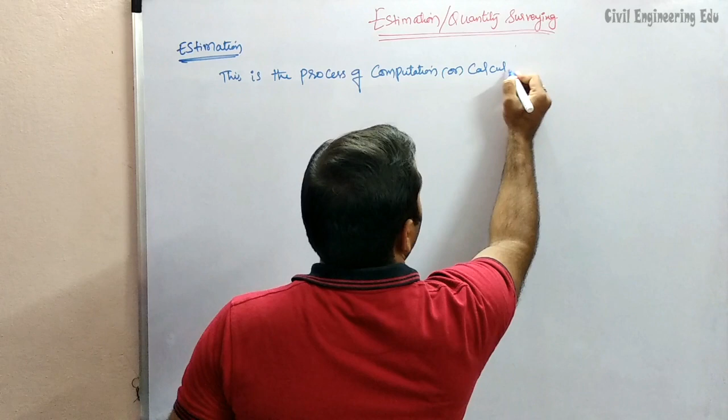So what is estimation? It is the process of computation or calculation of quantities required and also cost of a project before execution.

It is most important to know the quantities of the project as well as the cost. Mainly we need to focus on quantities required like men, material and machinery. These are most important for every project. We should know the quantities of them.

The next one is doing rate analysis and finding the cost of the project. This is nothing but estimation. Before any execution of a project, we should have proper knowledge on quantities required as well as the cost of the project.

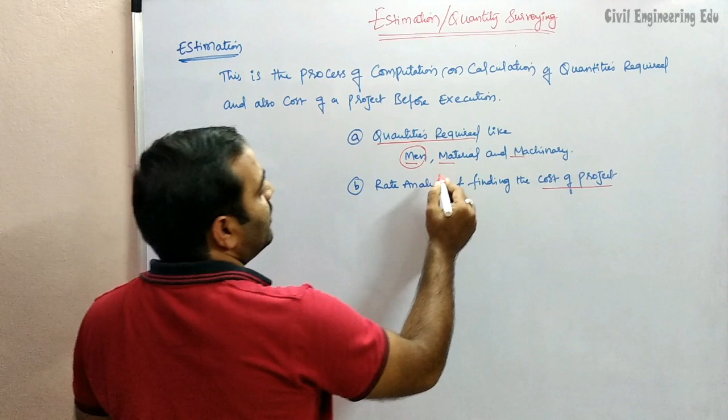Men means different types of people working in the construction project. They may be engineers, supervisors or any kind of laborers. Different materials will be used, like cement, concrete, steel or any other material. The next one is machinery. Different types of machinery are used in the construction project, and that should be known before execution.

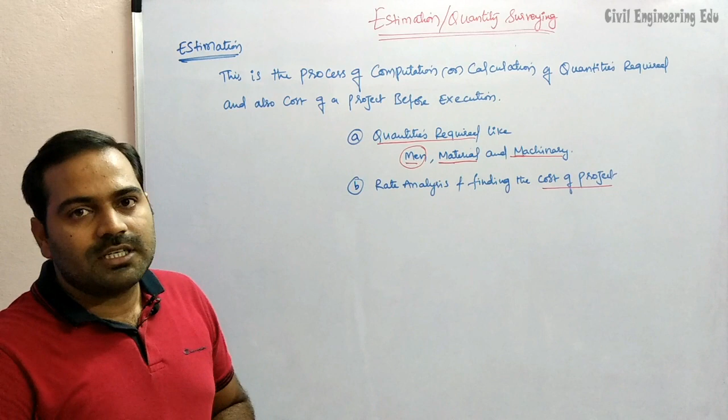This will give us a proper idea about the project. Every engineer, builder or owner should have proper knowledge on these. This is the importance of estimation and costing, also called quantity surveying. Let us see the actual purpose of doing estimation.

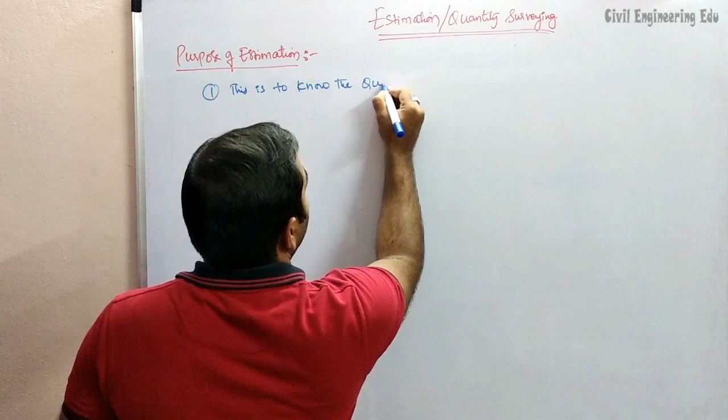Purpose of estimation. Here I'll write a few points. First, the main purpose of doing estimation is to know the quantities required, like men, machinery and material. Second one is to know the project cost.

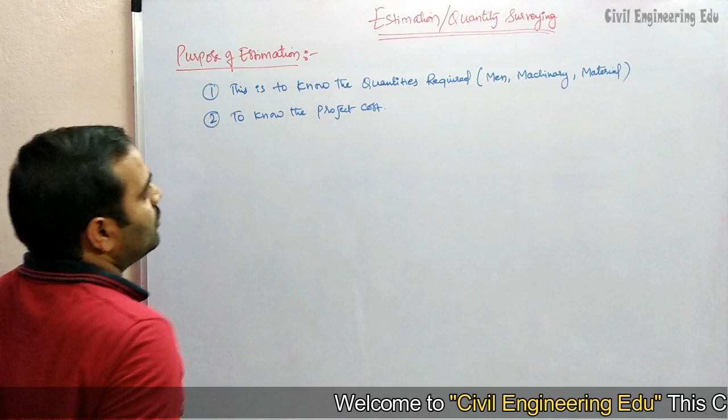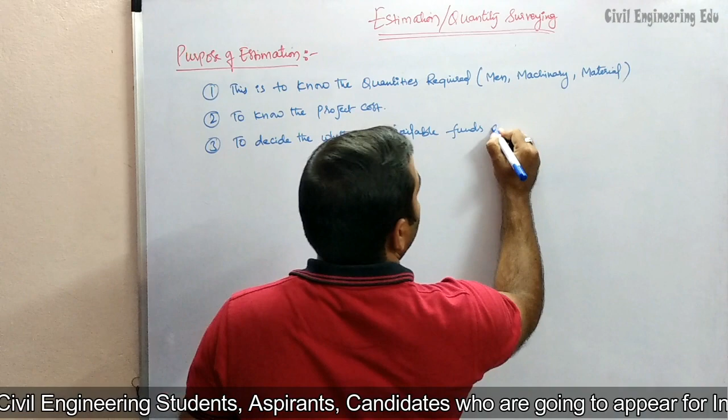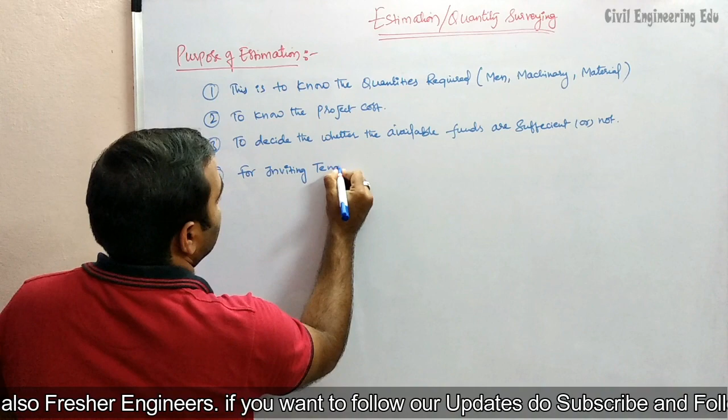Third one is to decide whether the available funds are sufficient or not. Fourth one is for inviting tenders. This is also one of the important points.

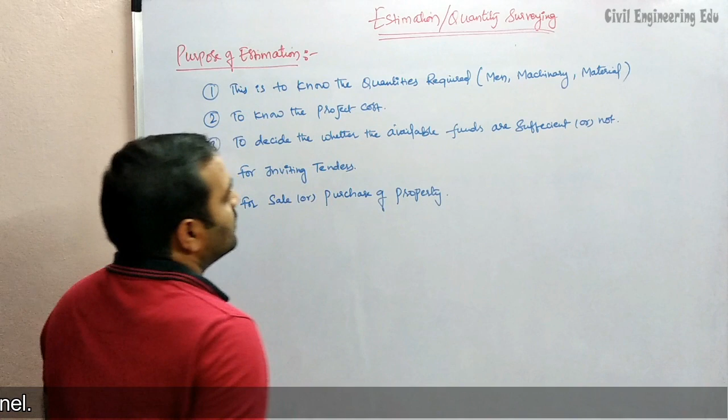Fifth one is for sale or purchase of property. Sixth one is for registration and deciding stamp duties. These are the six important points describing the purpose of doing estimation.

First is to find out the quantities like men, machinery and material. Second is to know the project cost. Third is to decide whether the funds available are sufficient or not. If not, we can go for some arrangements. If it is not possible to arrange the funds, we can modify the specifications so that the project cost can be decreased.

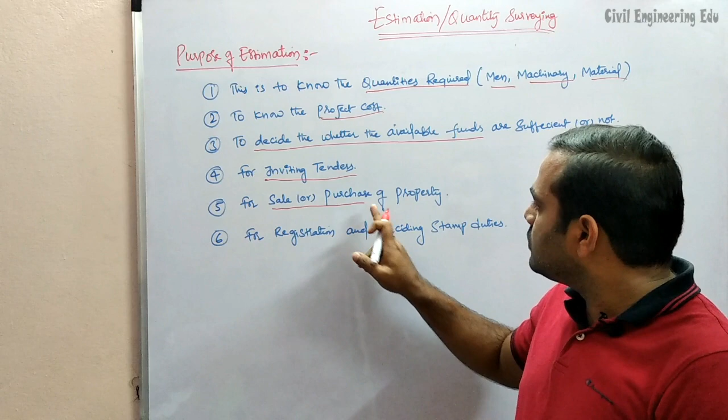Next is for inviting tenders for a project. Next, for sale or purchase of property, the property value should be known, so we do the estimation. Next is registration and deciding stamp duties. For property registration we should know the property value, so we do estimation. These are the important points for doing estimation. Now let us see the duties of a quantity surveyor.

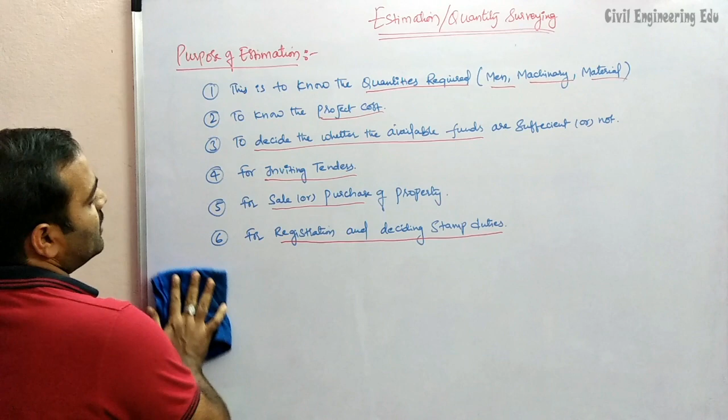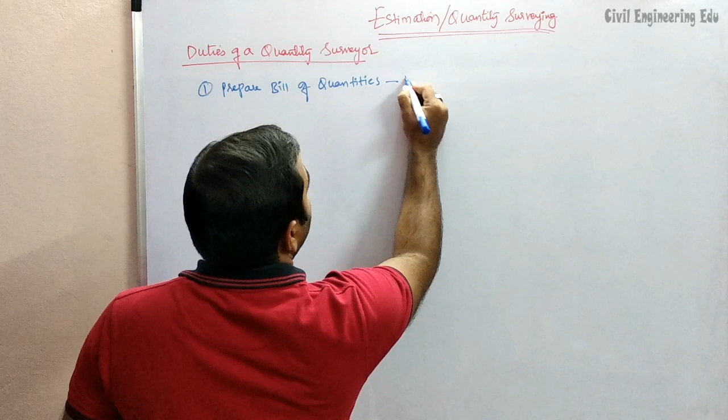So what are the duties of a quantity surveyor? What is the actual role and responsibility of a quantity surveyor, or he can also be called as estimator? So first one, prepare bill of quantities. It is also called as BOQ.

Second one is preparing bill of adjustments in case of modifications in designs during execution. So he needs to prepare bill of adjustments in case of changes in designs.

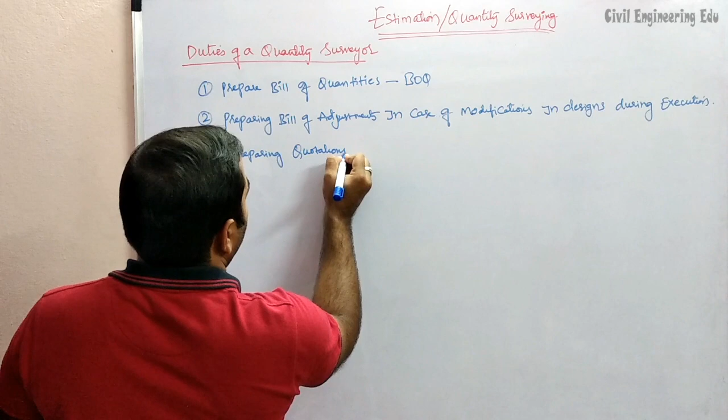Third one is preparing quotations or estimates for inviting tenders.

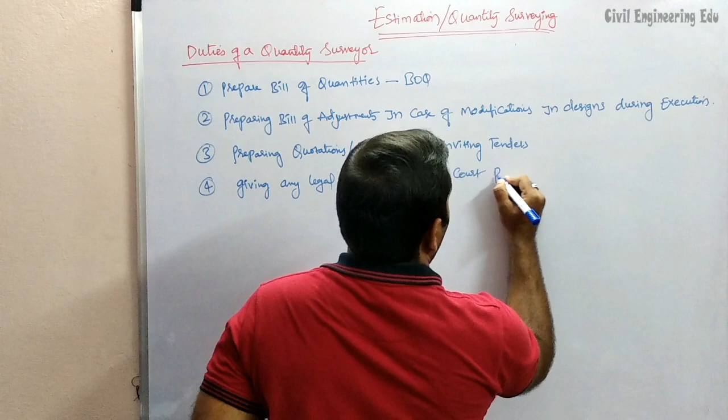So here fourth one is giving any legal advices in case of court proceedings. So these are the most important points and these are the responsibilities of a quantity surveyor or an estimator.

So here if you see bill of quantities, this is done based on the help of drawings. So drawings are more important here for preparing bill of quantities, that is also called as BOQ. Next one is preparing bill of adjustments. In case of any changes in the designs during construction, at that time also we should do the bill of adjustments.

Next, third one is preparing quotations or estimates for inviting tenders. So here it is the role of a quantity surveyor to prepare this. Next one is giving any legal advices in case of court proceedings. So in this case also he is the most important person. So these are the duties of a quantity surveyor.

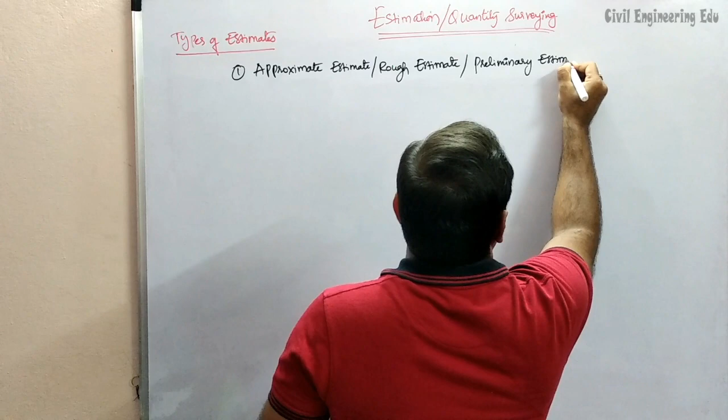So now let us see what are the types of estimates. Mainly estimates are of three types. So first one is approximate estimate, or rough estimate, or it is also called as preliminary estimate. Second one is detailed estimate and third one is abstract estimate.

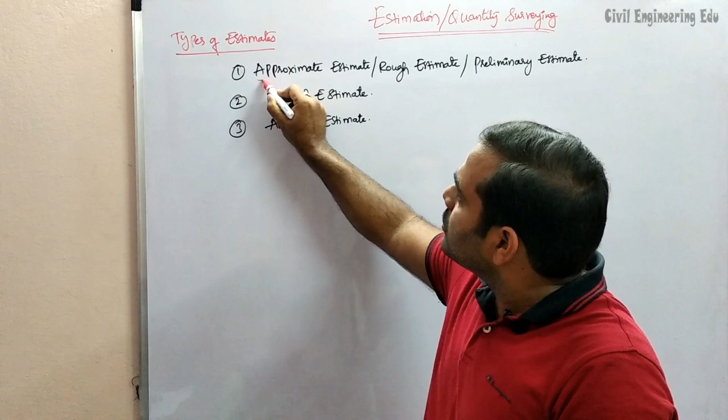So these are the three important types of estimates we come across. First one is approximate estimate, also called rough estimate or preliminary estimate. Second one is detailed estimate and third one is abstract estimate. So let us see what are they.

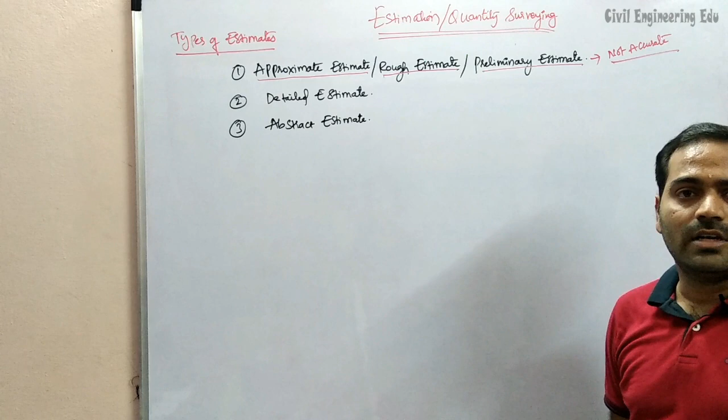If you take first one, this is not accurate. So whatever the cost, whatever the quantities we are finding here, this is only for preliminary study. This is just for idea purpose. So the estimated cost we got here is taken into consideration for preliminary levels.

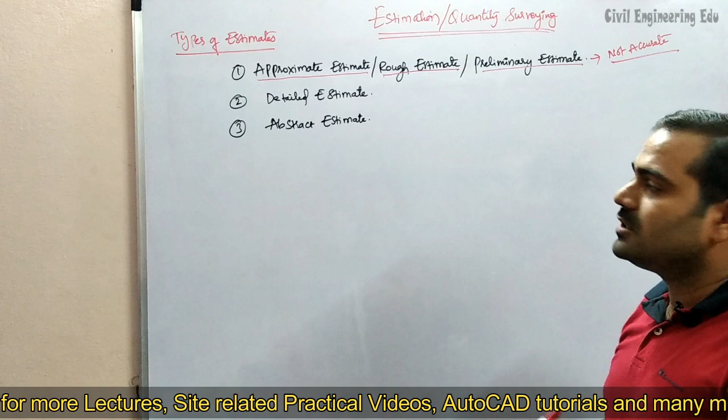So second point is here data is not required. Data like drawings, specifications, and third one is rates. So in this method, rough estimate, which is not accurate, data like drawings, specifications and rates are not required. This is only done for preliminary study.

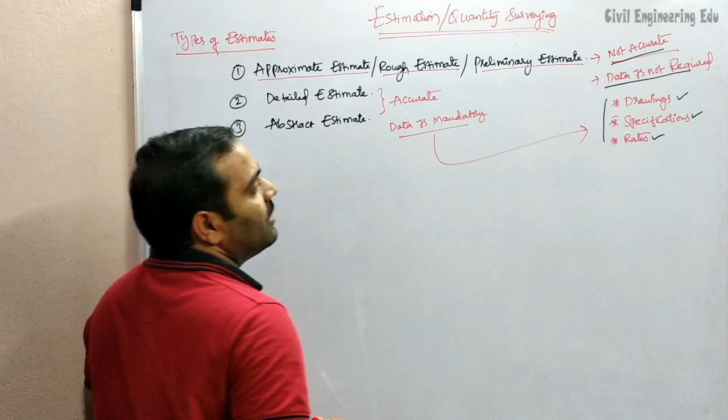So coming to second and third one, these two are accurate methods and data is mandatory. What is the data? Drawings, specifications and rates. These three are most important for doing detailed estimate and abstract estimate. So let us see one by one with an example.

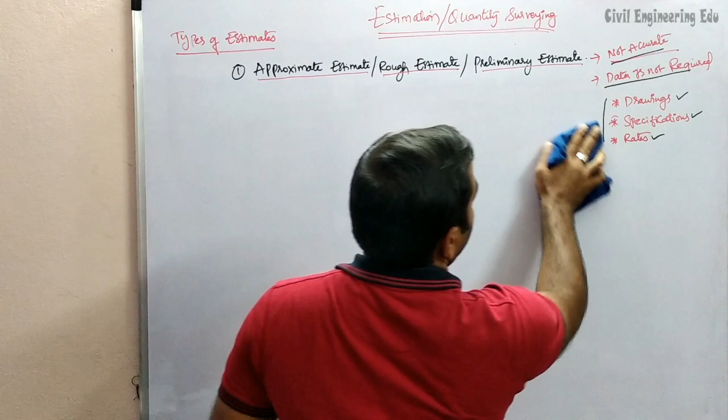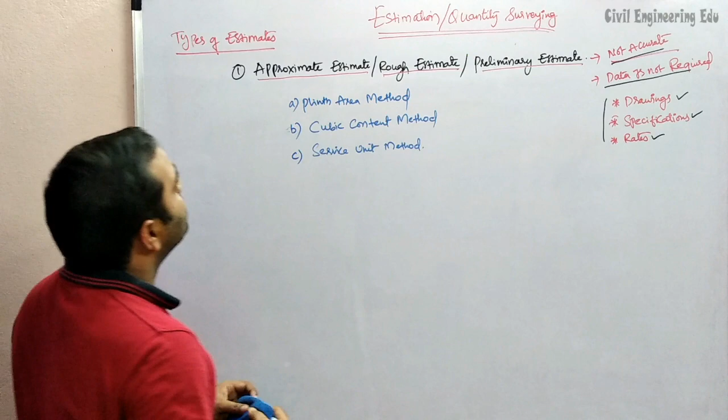Now this approximate estimate is again divided into three types. First one is plinth area method. Second one is cubic content method. Third one is service unit method. We will see these three methods one by one with an example so that you can understand it clearly.

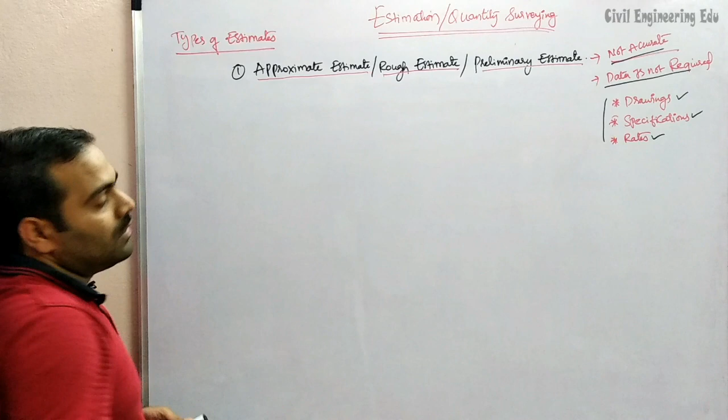So first one, plinth area method. These methods are mostly used for building calculations. So the formula for plinth area method: cost of building is equal to plinth area multiplied by plinth area rate. This is the formula we use for calculation of cost of building.

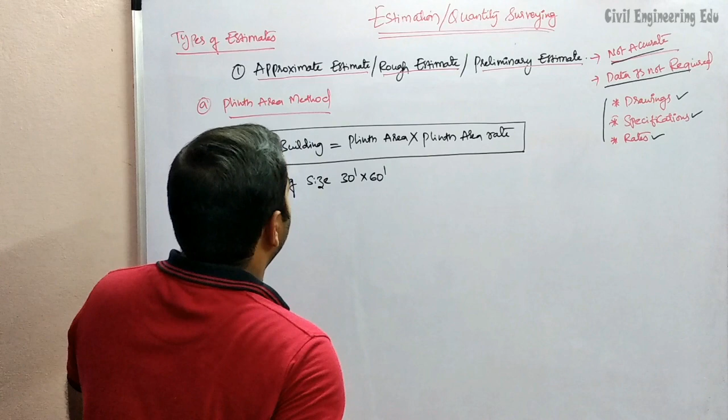So let us take an example. If I want to construct a building on a plot of size 30 feet by 60 feet and find out the cost of building, let me draw the plot. 30 feet this side, 60 feet this side. So area of plot is equal to 1800 SFT.

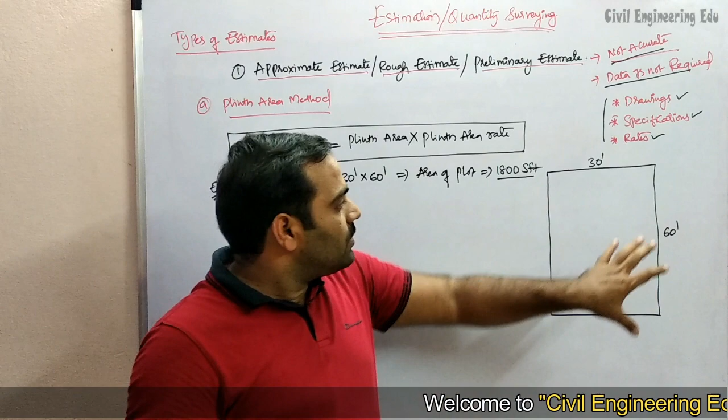So if I want to construct a building on that, according to the local municipal body, there are some norms. So we need to leave the setbacks for this plot. I'll show it here.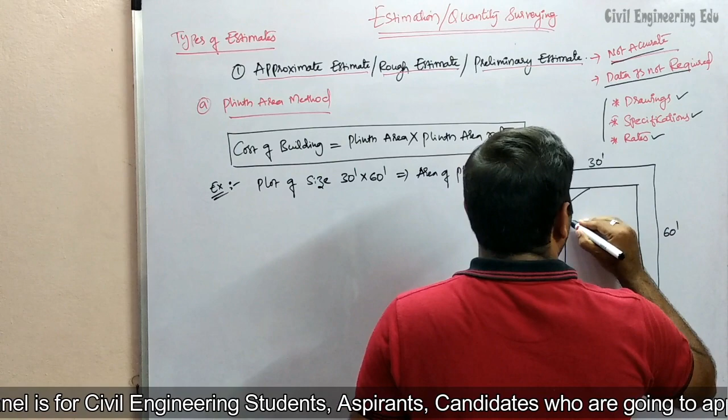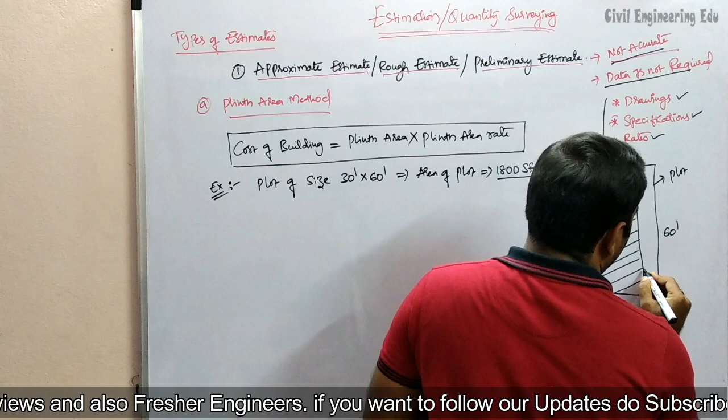So the area which I have drawn here, this is the area where we do the construction. So here it is, this is plot and this is plinth. So this outer box is the plot and this hatched portion is the plinth or built-up area in which we are going to do our construction.

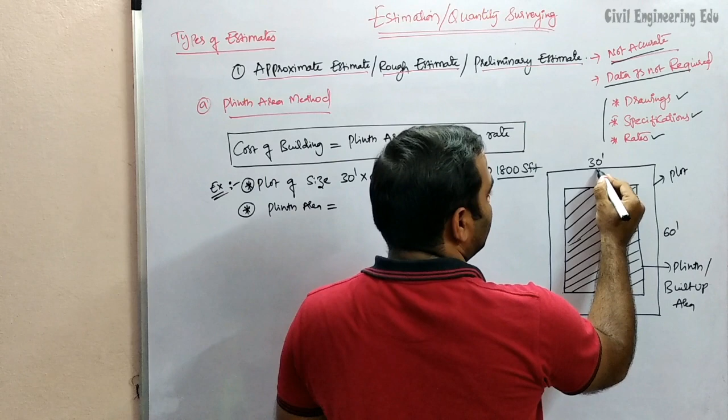So here, in the first one, the plot size is 30 feet by 60 feet and the area of the plot is 1800 SFT. Now let us see how to find the plinth area. According to the local municipal body, as I told you, there are some norms. We need to leave some gap all around the building. This gap is called setbacks. Setbacks are the space left over to provide proper ventilation and fresh air to the building.

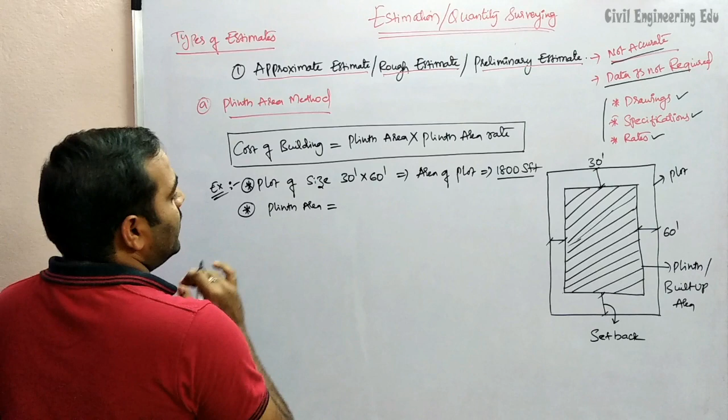So here we need to leave the setbacks. For plinth area, I am taking 75% of the plot area, that is 1800 SFT. The remaining 25% I am leaving as space for setbacks, for proper ventilation. So how much plinth area will I get? 1800 SFT into 0.75, so I will get 1350 SFT. This is my plinth area. Plot size is 30 feet by 60 feet and the area is 1800 SFT, but I am going to use only 1350 SFT for construction.

The third point is rate. How should I know the rate? Whenever we need to construct any kind of building, we will contact a contractor or an engineer. If we consult a contractor, he will charge around 1300 rupees per SFT to 1600 rupees per SFT. Our plinth area is 1350 SFT.

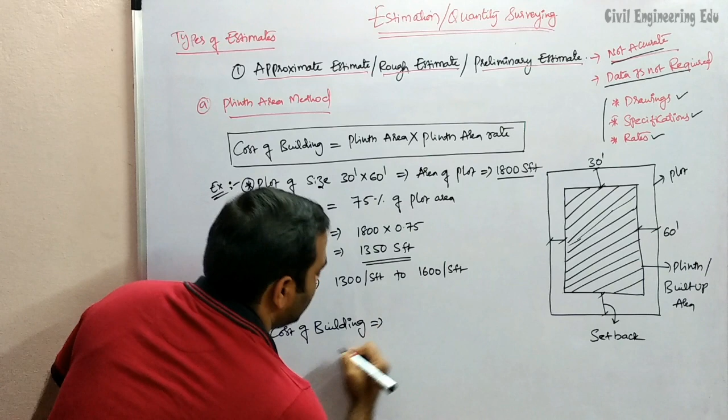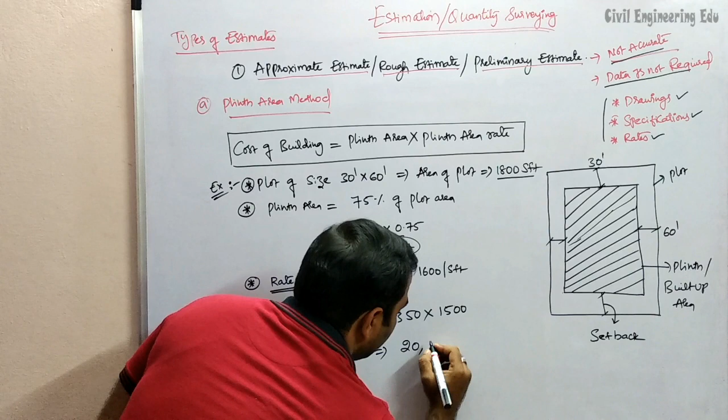To get the cost of building, as I have written the formula here, cost of building is equal to plinth area multiplied by plinth area rate. So cost of building is equal to plinth area, 1350, into, not 1300, not 1600, approximately 1500 rupees per SFT. So the cost of building will be 20 lakh 25,000 rupees. This is the cost of construction for a plot of size 30 feet by 60 feet.

I hope you understood. Based on the plinth area, we need to find the cost of building. Here I have taken a 30 feet by 60 feet plot, and from this I have taken 75% for construction. I got 1350 SFT as the plinth area, and the rate I have taken is 1500 rupees. If you multiply plinth area 1350 into 1500, you will get this cost. So this is the example for the plinth area method. Now let us go with the second method.

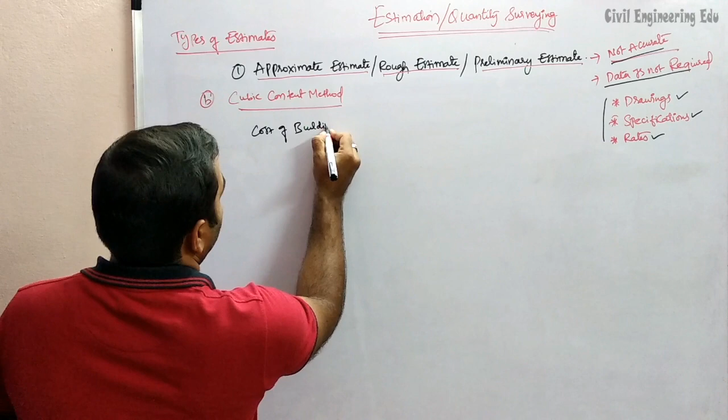The second one is the cubic content method. This is the second method in approximate estimation. In the cubic content method, I'll write the formula here. Cost of building is equal to cubic content multiplied by cubic content rate. So cost of building is equal to cubic content, that is nothing but the volume of the building, multiplied by cubic content rate. Let us see the example for this one.

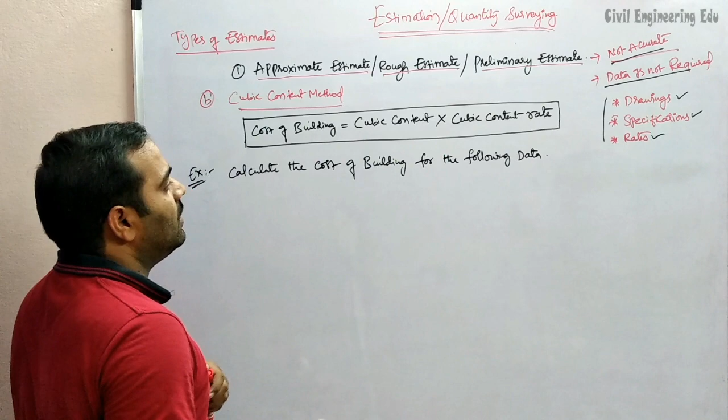For example, if I want to construct a building, calculate the cost of building for the following data. Let us take an example. Plinth area is equal to 400 square meters, height of each floor is equal to 3 meters, and total number of floors are G plus 2, ground plus 2 floors.

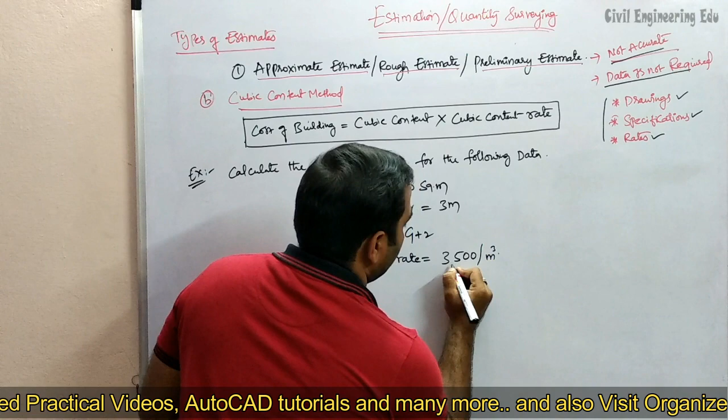Now cubic content rate. Let us take cubic content rate equal to 3500 per meter cube. So this is the example for the cubic content method. We need to find the cost of building. The given plinth area is 400 square meters and height of each floor is 3 meters. Number of floors are G plus 2, that means total 3 stories, and the cubic content rate.

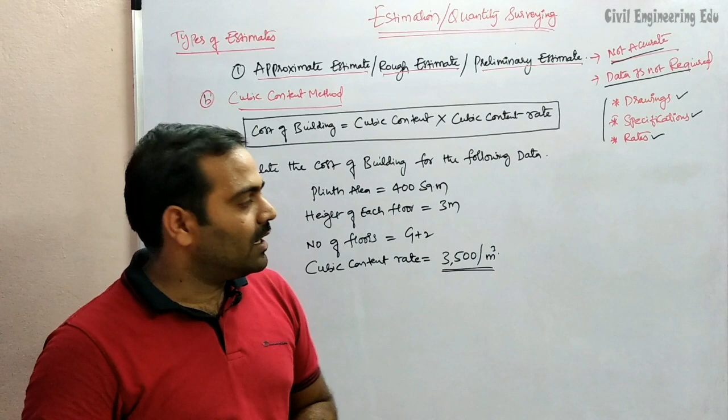So how did we get this? This cubic content rate, or plinth area rate, or service unit rate, we get based on the analysis of recent building constructions in the locality. So this rate is taken from nearby buildings constructed in our area. So this is the rate, and we need to find out the cost of building. So here cost of building is equal to cubic content. What is cubic content? I'll write it here.

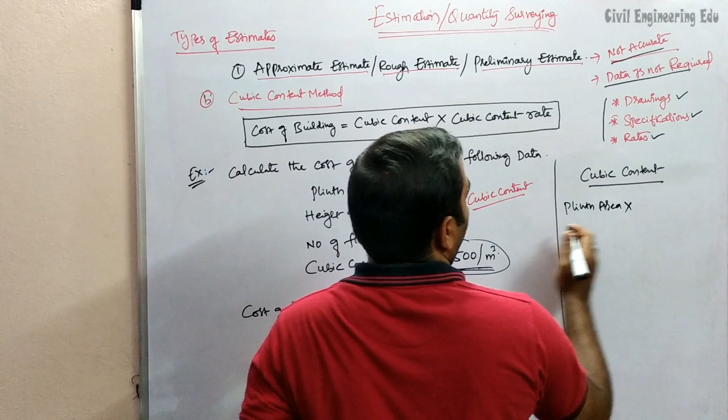Cubic content is nothing but the multiplication of plinth area, height of each floor and number of floors. So these three come under cubic content. So here plinth area multiplied by height of each floor multiplied by number of stories. So here we have to multiply this one and this one.

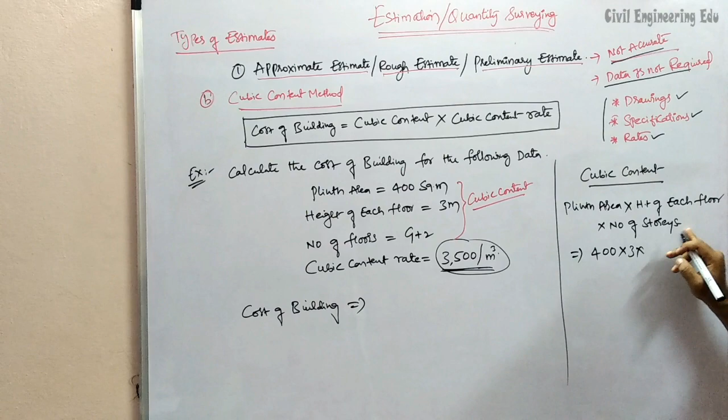So if we multiply plinth area 400 square meters, we need to multiply with height of each floor, that is 3 meters, and we need to multiply number of stories. That is G plus 2, that means 3 stories. So here we need to multiply with 3. So here we will get the cubic content. So directly I will do it here.

Cost of building is equal to cubic content, as I have written there, 400 into 3 into 3. So this is cubic content volume, and the rate we have taken is 3500. So how much we will get? Let us calculate. So here 1 crore 26 lakh. So this is the cost of building which we got from this question. So this is the example for cubic content method. I hope you understood this.

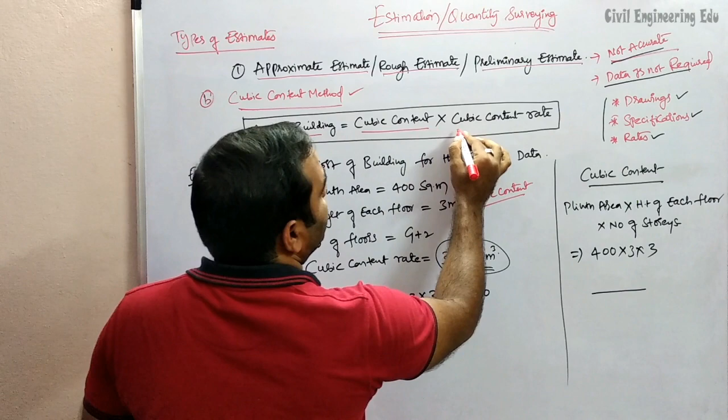So cost of building is equal to cubic content into cubic content rate. So this is cubic content which we got, and this is the cubic content rate. If we multiply the two, we will get the cost of building. So this is the example for cubic content method. So let us go with the third method.

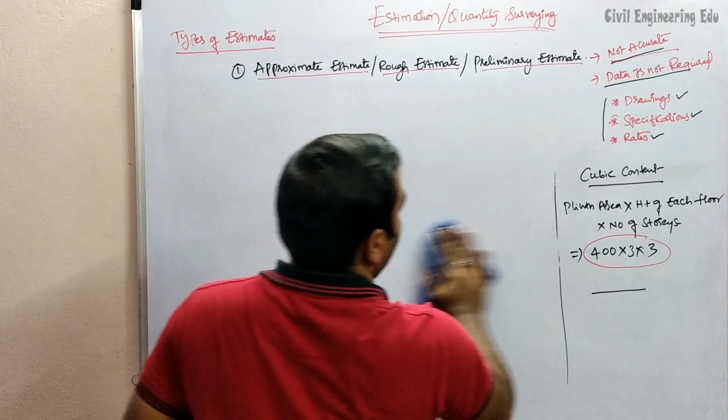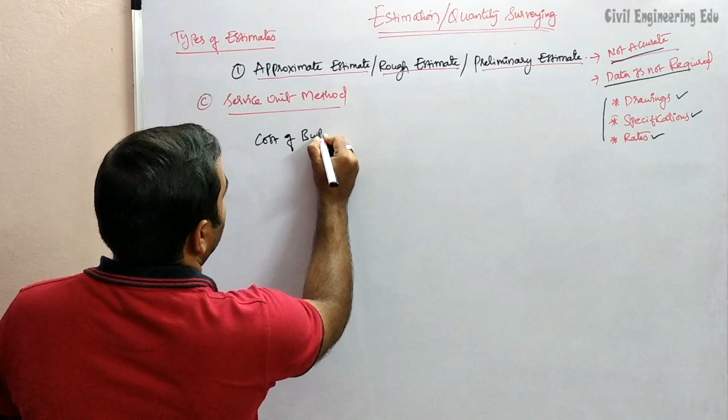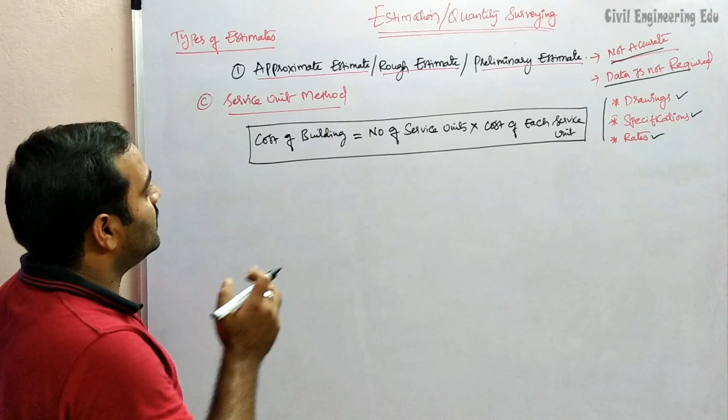Next, the third method is service unit method. So I'll write the formula for this. Cost of building is equal to number of service units multiplied by cost of each service unit. So this is the formula. Cost of building is equal to number of service units multiplied by cost of each service unit. So here let us see what is service unit.

So service units depend on type of structure. This is type of structure and service units. So what are the types of structures? First one is school building. If you are taking school building, the service units will be number of students. If you are taking hospital building, number of beds. If you are taking auditorium, number of chairs.

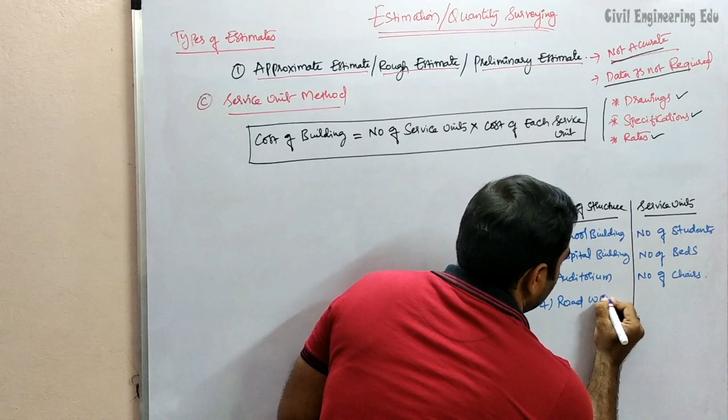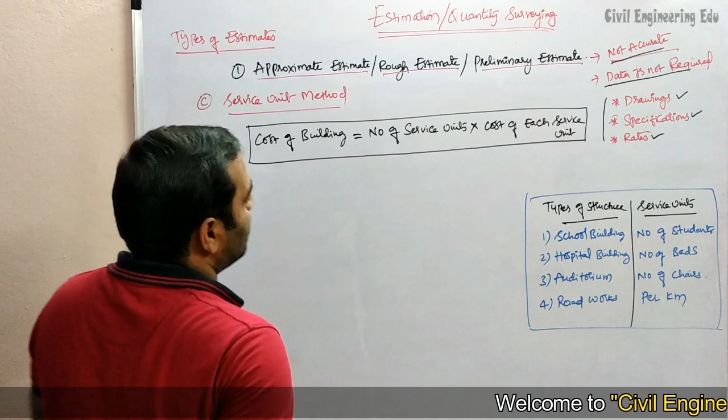Similarly, if you are taking roads, for road works, per kilometer. So these are service units. So let us take one example. Calculate the cost of building for a hospital with 20 beds. So the question is, calculate the cost of building for a hospital with 20 beds.

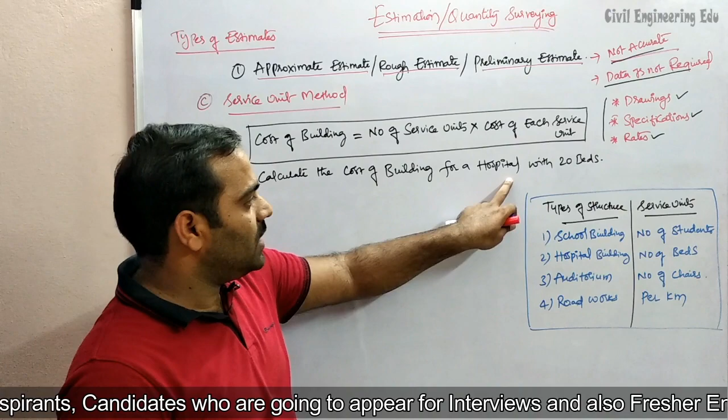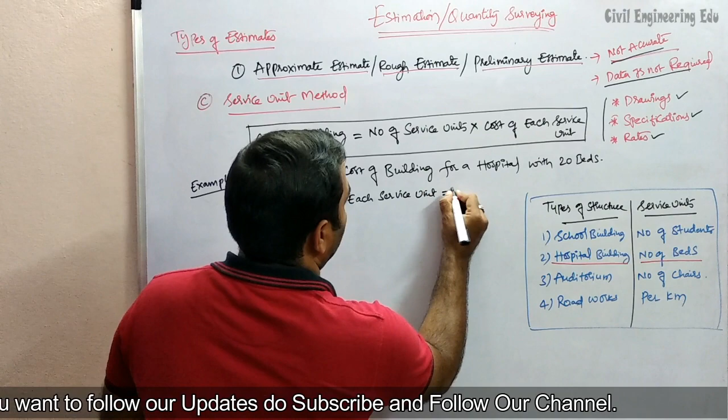So for hospital we need to take number of beds. So there are total 20 beds. Cost of each service unit, let us take 80,000 rupees. This is per service unit. Let us write like this. So cost of each service unit is equal to 80,000 rupees per unit. So I need to find the cost of building. So from the formula, cost of building is equal to number of service units, that is 20 beds, and cost of each service unit.

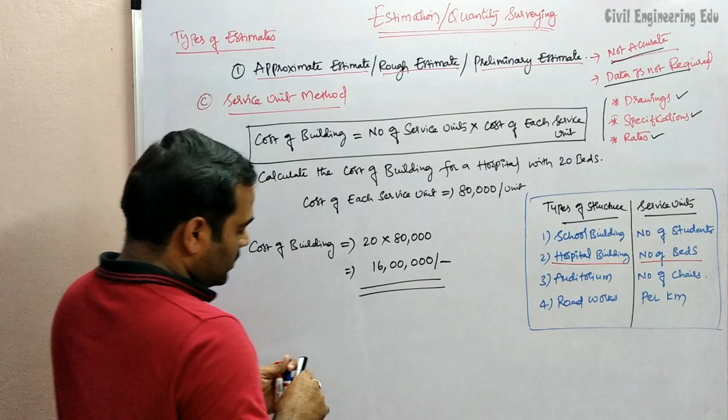So cost of building is equal to number of service units, that is 20, into each service unit value, 80,000 rupees. So it will be 16 lakh. So this is the cost of building and the example for service unit method. In service unit method, this is very simple. Cost of building is equal to number of service units multiplied by cost of each service unit, so we get 16 lakhs. Based on type of structure, we need to select the service units.

So let us go with the second type of estimate, that is detailed estimate, and the third one is abstract estimate. Now let us see detailed estimate. This is the second type. As I told you about this type of estimate, we will see in detail. First, this method is accurate. Second point is data is required, like drawings, specifications, and rates. So this is most important.

Third one is, in this method only we can calculate quantities. Next one is different items of work. All items of work like earthwork, PCC, RCC, it may be for footings, columns, whatever it may be, plastering, etc. should be calculated separately.

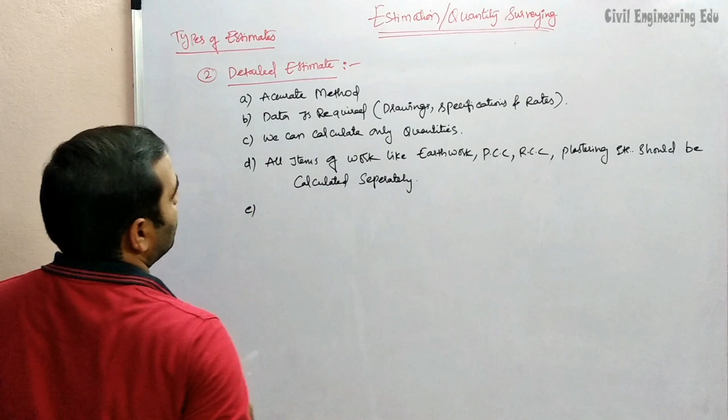Next point, all the items of construction should be in order, that is from excavation to plastering.

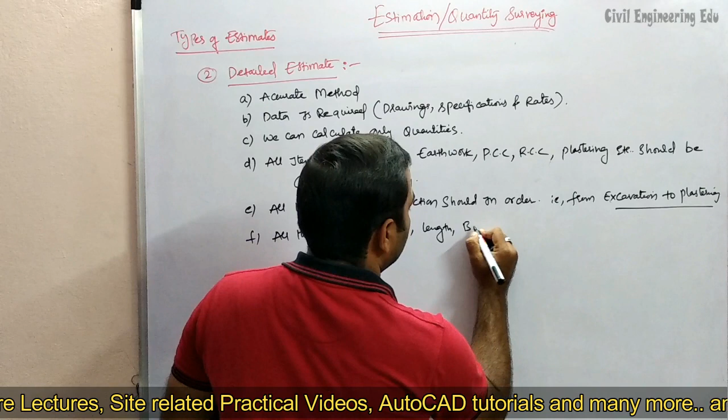Next one is all the dimensions like length, breadth, depth or height, and numbers should be taken from drawings correctly.

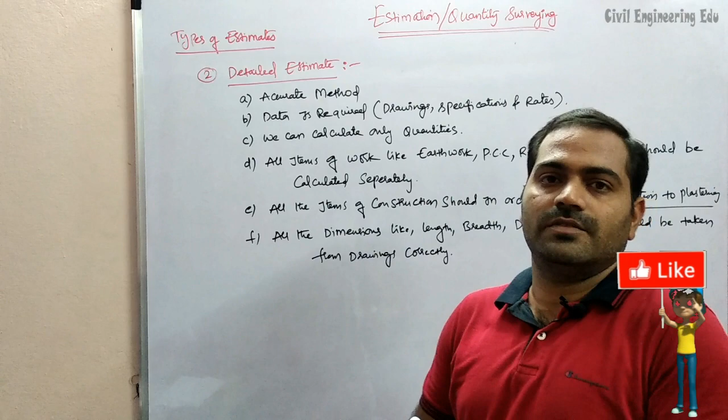So these are all the important points which I have written here. In case of detailed estimate, these are most important points which we need to remember. So first one is, this method is accurate method, as I told you before, and second one is data is required. So which type of data we require? We require drawings, specifications and rates. But here I told only we can calculate quantities, but this data is required. This data we'll use in

abstract estimation. So here third point, we can calculate only quantities. You should keep in mind that in this detailed estimate we can calculate only quantities. Cost can be calculated in abstract estimation. So next one is D.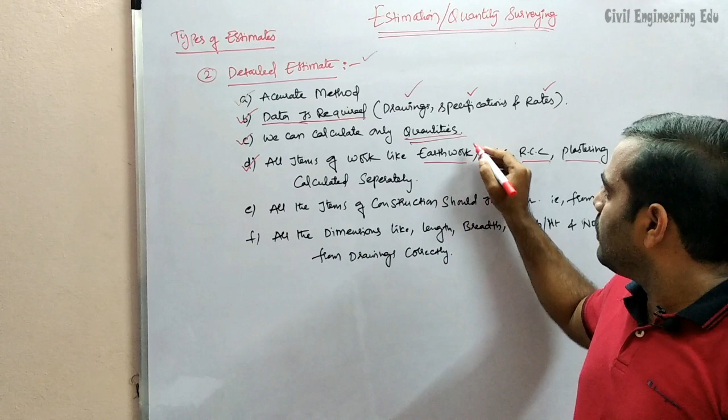All items of work like earthwork, PCC, RCC and plastering, this should be calculated separately. If you are calculating earthwork, all the earthwork should be in separate format. And next PCC, if you are calculating PCC, all the PCC calculation should be separate. Next one is RCC, all the RCC should be separate. So like this we need to calculate separately for all items of work.

Next point is, all the items of construction should be in order. So generally how we'll do the construction? So first of all we'll go for excavation, next one is PCC, next one is RCC for footing, next one is neck columns and all. So in that proper order of construction we need to take the quantities.

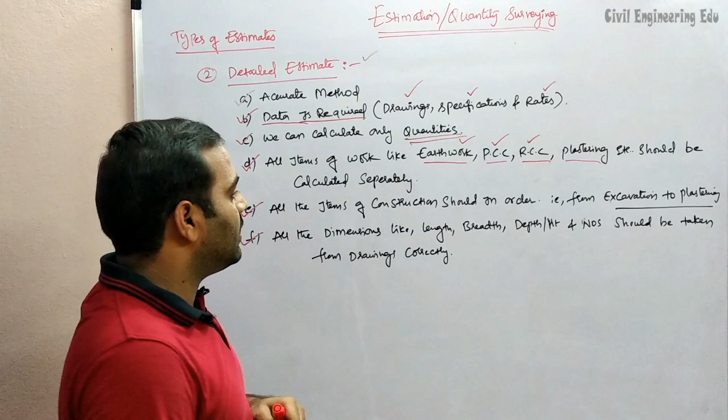So last one is, all the dimensions like length, breadth, depth or height and numbers should be taken correctly from drawings. All these dimensions should be proper from the drawings. If the drawings are not clear, then our calculation will be completely wrong. So this is the reason why we require this data. So let us see what is the standard format. So standard format of calculation.

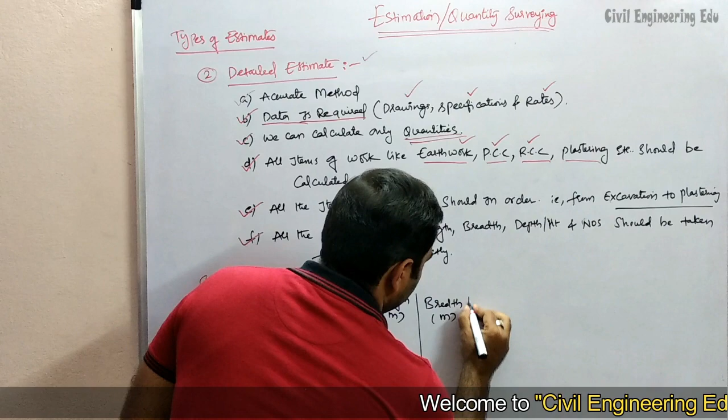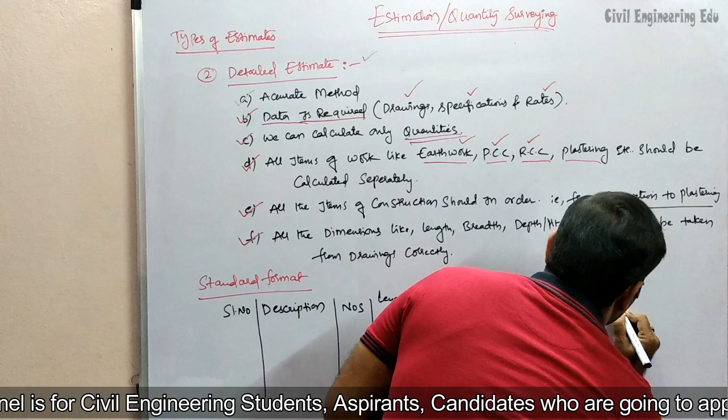So this is the standard format. Serial number, description, numbers, length, breadth, depth or height and quantity, it may be meter square or meter cube, and last one is total quantity, it may be meter square or meter cube, and at last it will be remarks.

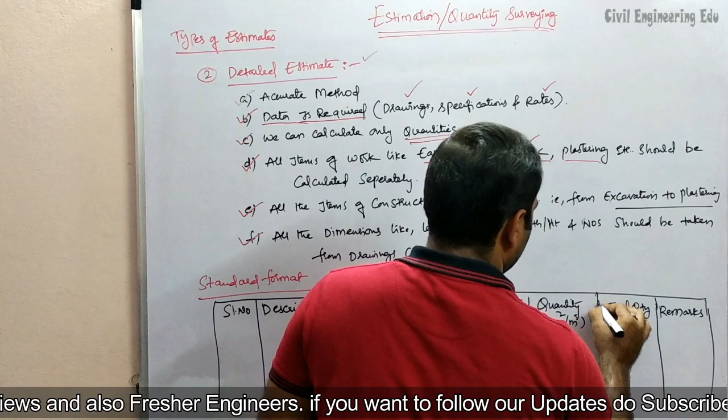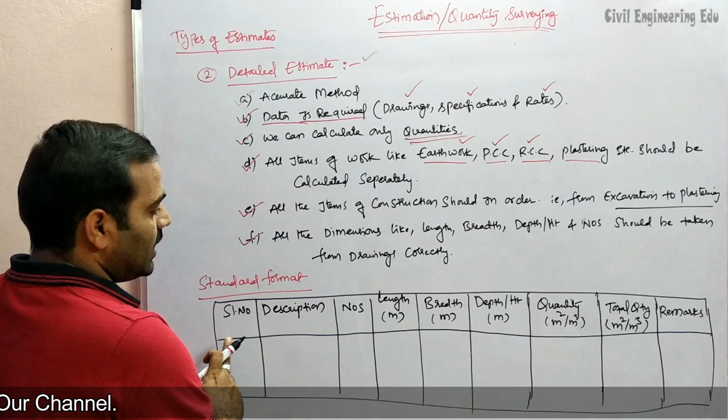So this will be our table. This is the standard format of detailed estimate. So by using this table we will do the calculations. So there are total 9 number of columns which you have to remember here. Serial number, description, numbers, length, breadth, depth, quantity, total quantity, at last remarks.

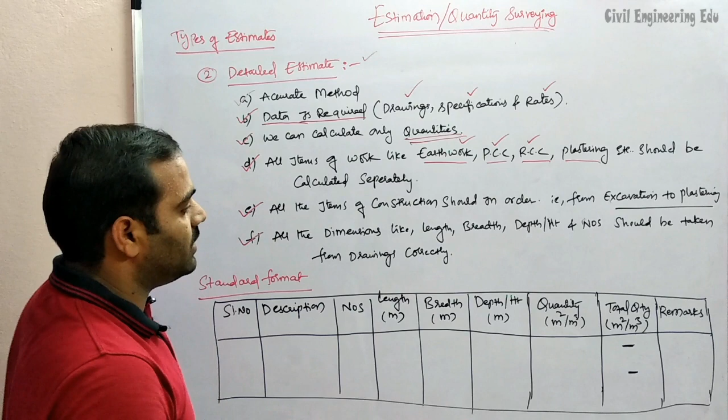So these all we need to fill one by one based on the drawing dimensions. So by seeing the drawing dimensions correctly, we have to fill this, and at last here we need to find the quantities. So whatever the quantities we are obtaining here, this quantity should be written in abstract estimation. I will explain next. So this is the detailed estimate, and next one is abstract estimate. Let us see that.

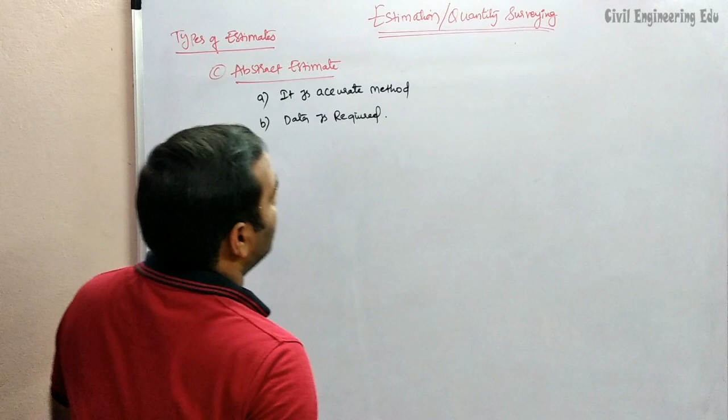So third one is, last one is abstract estimate. Here I'll write few points. First one is, it is accurate method. Data is required for this. And third one is only cost can be estimated. Only cost can be estimated.

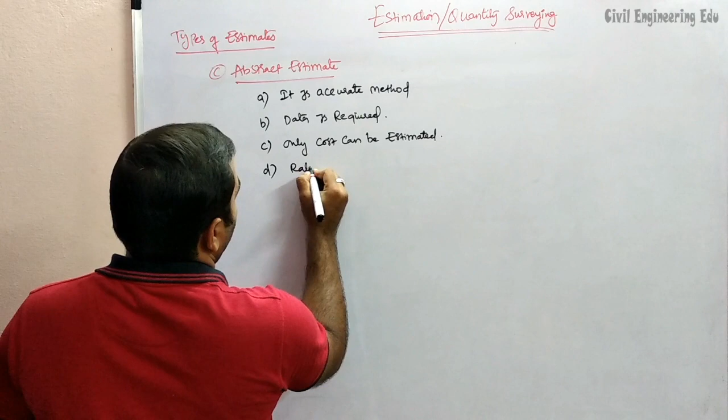So here, and one more thing, rates are taken by doing rate analysis or from SSR. Okay, rates can be taken by doing rate analysis or from SSR. So these are the most important points which we need to remember while doing abstract estimation.

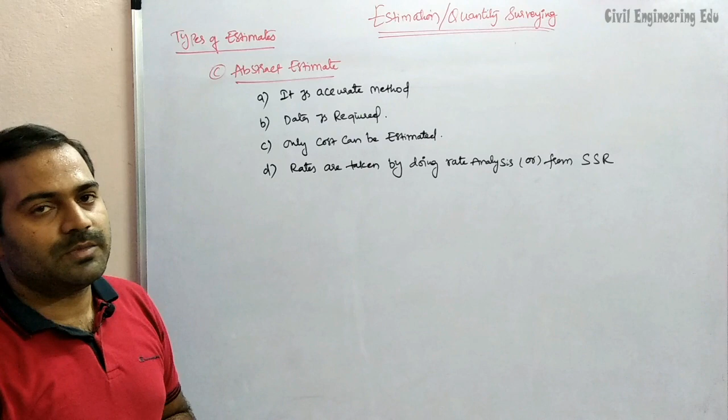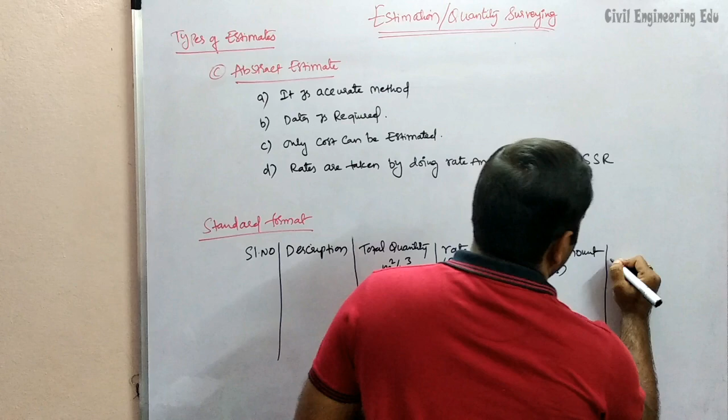So let us see the standard format. So here, serial number, description, next one is total quantity. It may be meter square or meter cube. Next one is rate, this is in rupees. And next one is unit, and next one is total amount in rupees, and next one is remarks.

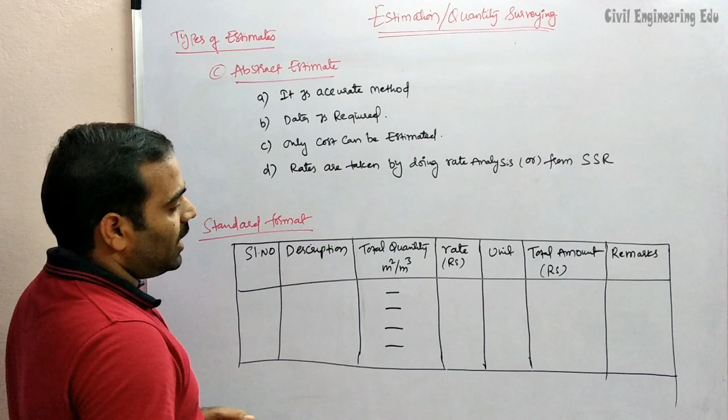So this is the standard format of abstract estimation. So here, after getting the quantities in detailed estimation, we need to write that total quantities here, and we have to take the rates from SSR or by doing rate analysis. By doing rate analysis, we will get some rates that we can use here, or else from SSR also we can take the rates.

So if we multiply total quantity and rate, then we will get total amount here. So multiplication of total quantity and rate will give you total amount here. So if we add this total amount, we will get the total amount here. So this is the procedure of calculation of cost in abstract estimate method. So these are the three important types of estimates which we have seen here. So examples for detailed estimate and abstract estimate we will see in the next lecture.

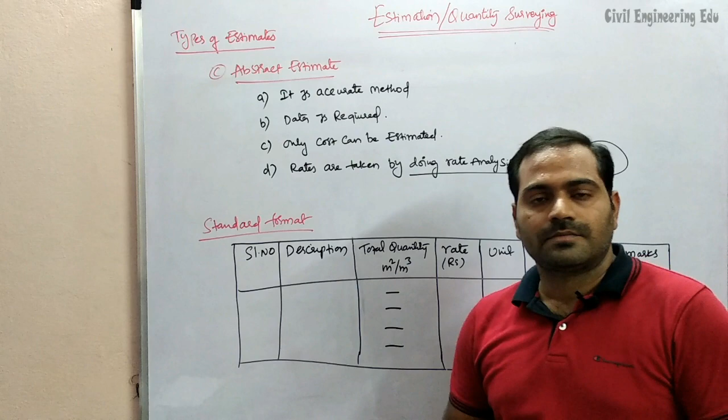So that's all for today. We have covered what is estimation, purpose of doing estimation, and what are the duties of an estimator or a quantity surveyor, and also different types of estimates like approximate estimate, detailed estimate, and also abstract estimation.